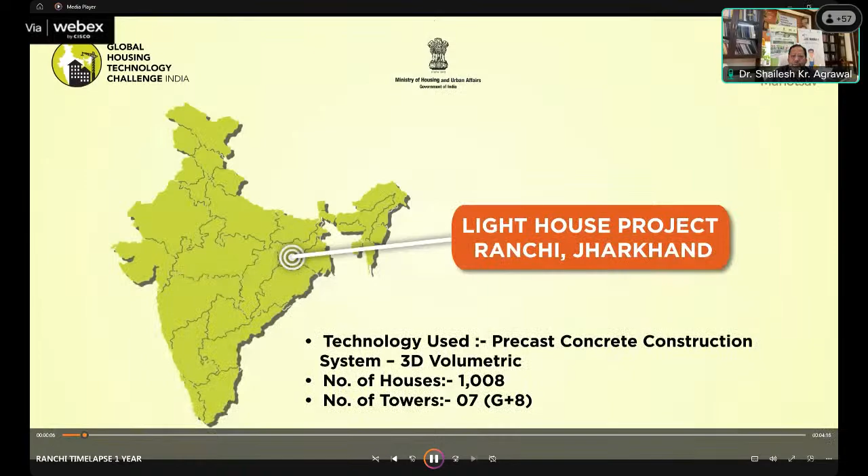Ministry of Housing and Urban Affairs, Government of India, has initiated the Global Housing Technology Challenge India to identify and mainstream best available global technologies, bringing a paradigm shift in the construction sector. 54 innovative technologies across 6 broad categories were shortlisted during the challenge process.

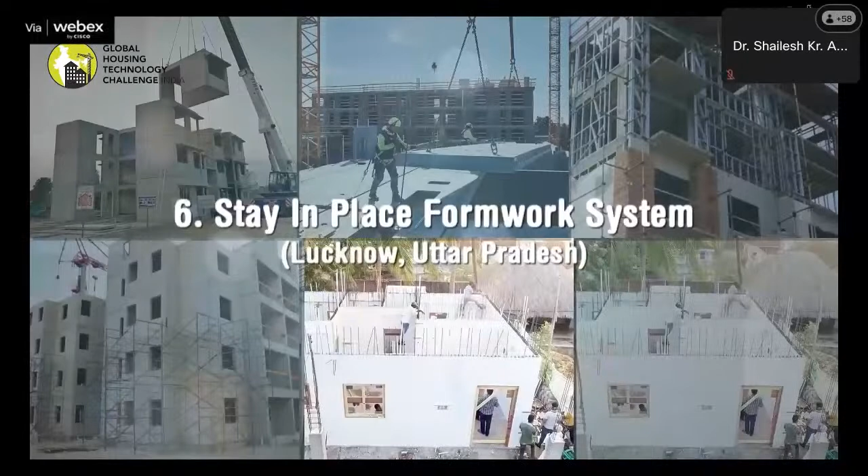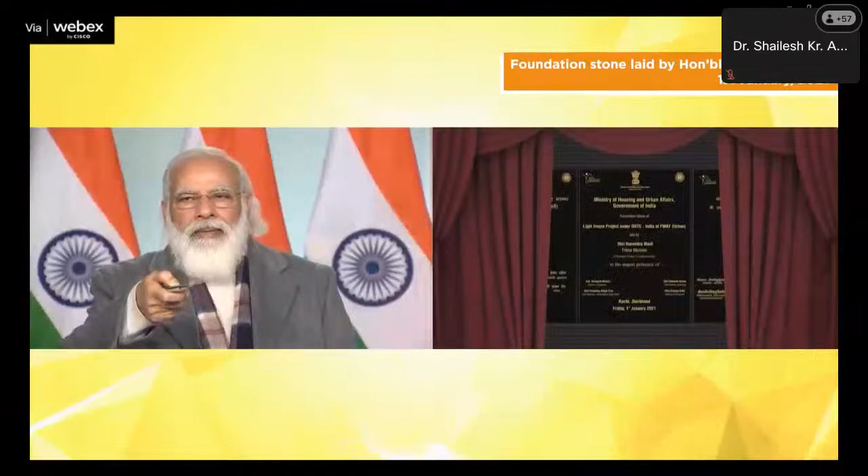6 lighthouse projects at 6 locations with 6 distinct technologies are being constructed. One Light House Project uses precast concrete construction with 3D volumetric modules, featuring 1008 dwelling units in G+8 configuration, along with all basic and social infrastructure facilities, being constructed at Ranchi in partnership with the State Government of Jharkhand. The Honorable Prime Minister laid the foundation stones of all 6 lighthouse projects, including at Ranchi, on 1st January 2021.

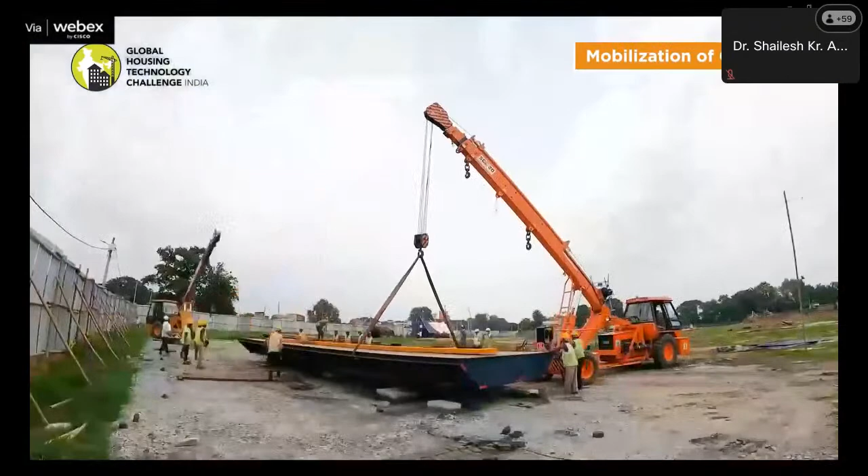Due to ground level issues, actual construction work of LHP Ranchi could only start in August 2021. The construction work is now in full swing. This 3D volumetric construction system is being used for the first time in construction of houses under PMAY-U. In this fast-track system, solid precast structural modules like room, toilet, kitchen, bathroom, and stairs are cast monolithically in a casting yard at the site under controlled conditions.

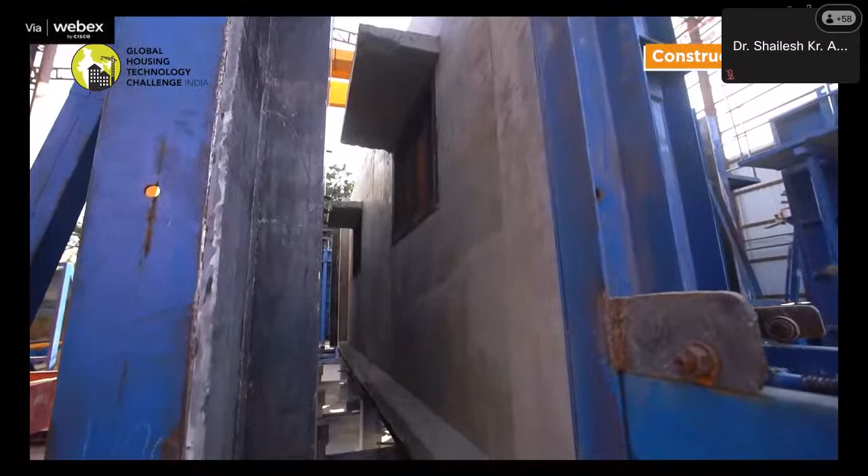In this modern system, construction begins with the design foundation of the building kept ready, while manufacturing of precast concrete structural modules takes place in the casting yard. Finished rooms, toilets, kitchens, and bathrooms are then installed at the site with the help of tower cranes.

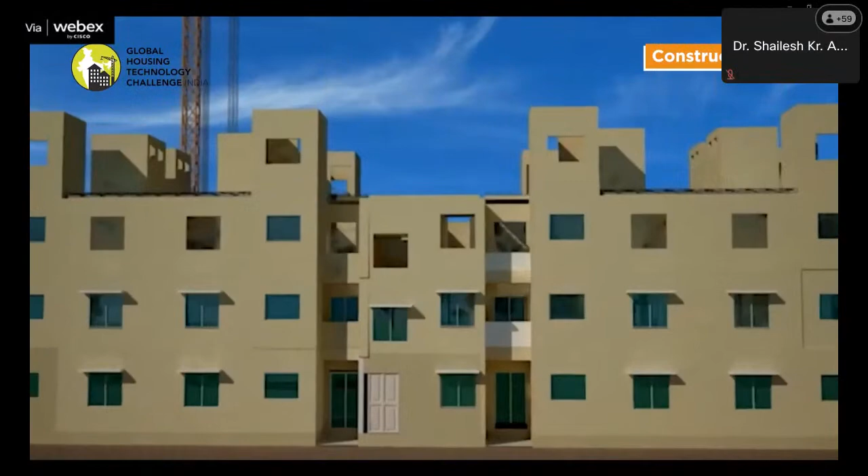Gable end walls are positioned to terminate the sides of the building. Pre-stressed slabs are then installed as flooring elements. Rebar mesh is placed for structural screed, connecting all the elements together. Consecutive floors are built in similar manner to complete the structure. About 90% of building work, including finishing, is completed in the casting yard, which saves overall construction time.

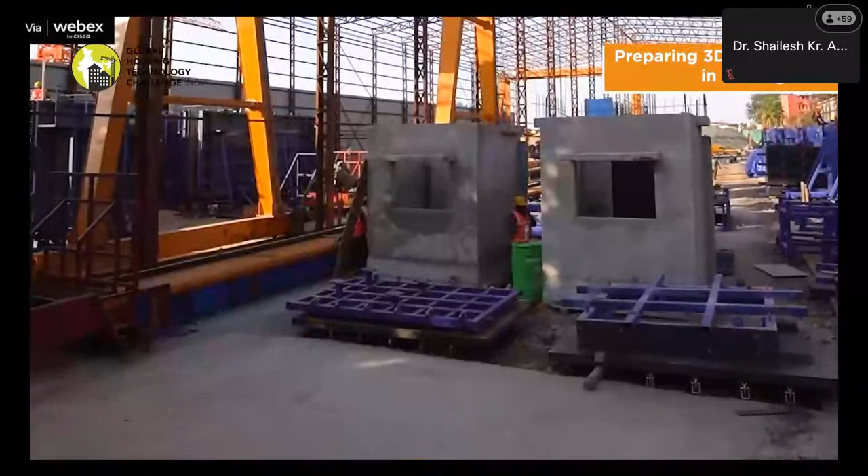The casting yard adjacent to the construction site in Ranchi, with all facilities, is now functional and is being used for production of precast 3D and other components. While casting yard facilities were being established, raft foundations for all 7 towers were initiated and are now at different stages of construction. Once foundation work up to grade slab is completed in a tower, precast 3D components ready in the casting yard will be installed at the site to complete the tower.

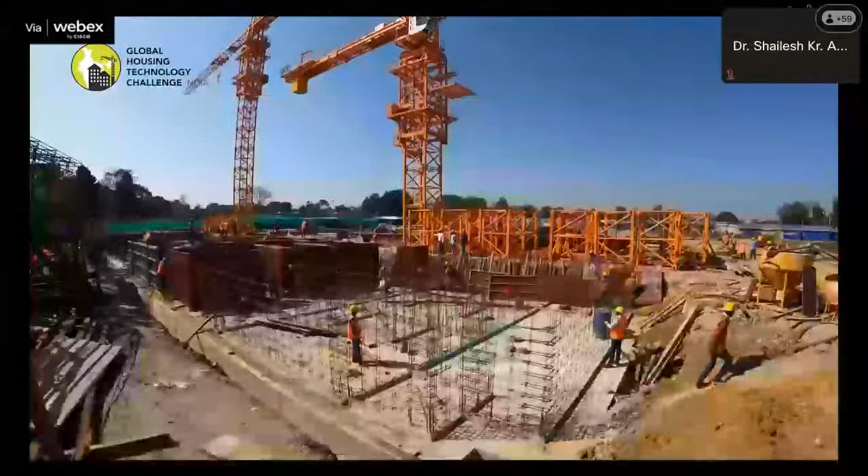With all these parallel activities, the project is progressing well and is expected to be completed well within the stipulated time. There is tremendous response for booking these houses by beneficiaries. The LHP Ranchi is serving as a live laboratory for learning, with about 200 Technograhis and other stakeholders visiting the site to learn the use of innovative technology in a real project.

Good afternoon. My name is Pankaj Gupta. I hope I am audible and my screen is also visible to you. Can anybody confirm it? Yes, go ahead, you are audible. Yes, go ahead. Okay, thank you, sir.

My name is Pankaj Gupta. I am from the Building Materials and Technology Promotion Council. The film which you just saw was somewhat older. My colleague will show you the latest development in this project, which is almost in completion stage. Meanwhile, I will start with the presentation on the technologies from the global housing technology challenge, and otherwise also these are alternate systems to the conventional systems which are prevailing right now in India.

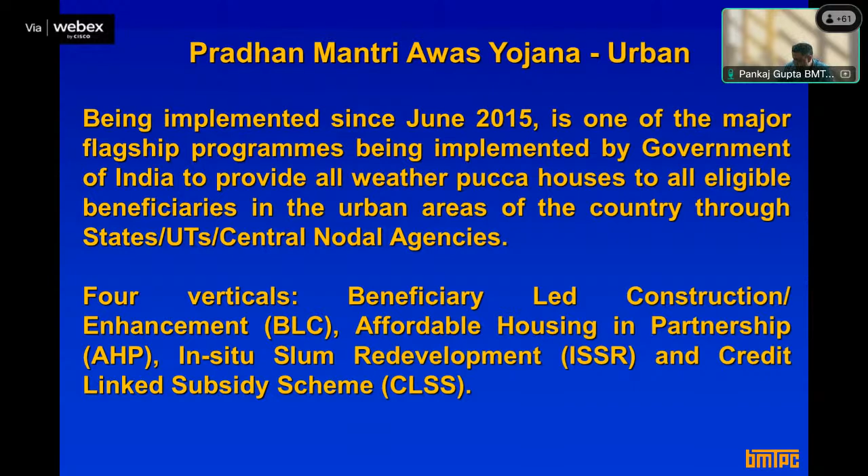Just to give you the current progress of the scheme: approximately 119 lakhs, or 11.9 million houses have been sanctioned. Out of those, around 113 lakhs have been grounded with construction going on, and 77 lakhs are already completed. This is the size of the scheme - we have more than 100 lakh houses under this scheme, which is the biggest scheme in the world.

That's the background. Now I will move to the technology part.

When the scheme started in 2015, during one meeting the discussion was going on and a demand came from various states that the requirement would be more than one crore houses. The duration of the scheme was 7 years. The question was how to construct more than one crore houses in 7 years with conventional systems, which are slow-paced, given constraints on resources, labor and manpower.

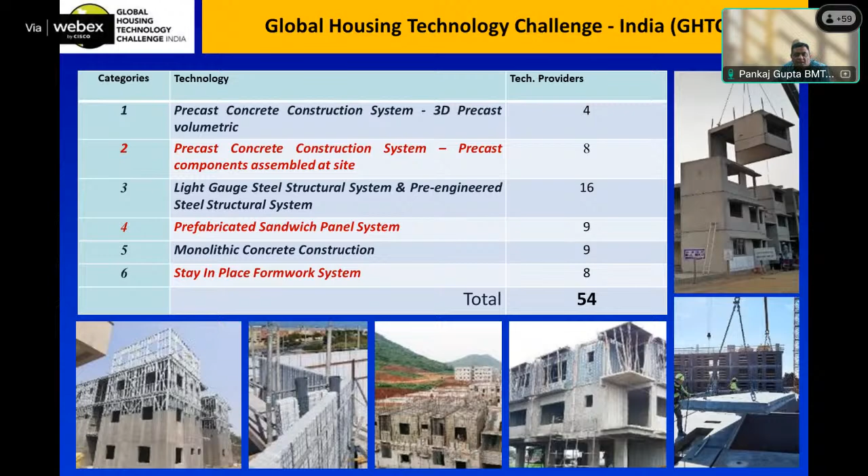As shown in the movie, for the 6 Lighthouse Projects, the idea was to implement and showcase this technology on the ground. It was decided that at least one lighthouse project should be constructed out of each category, so accordingly 6 states were identified.

Your mic? Mr. Patra.

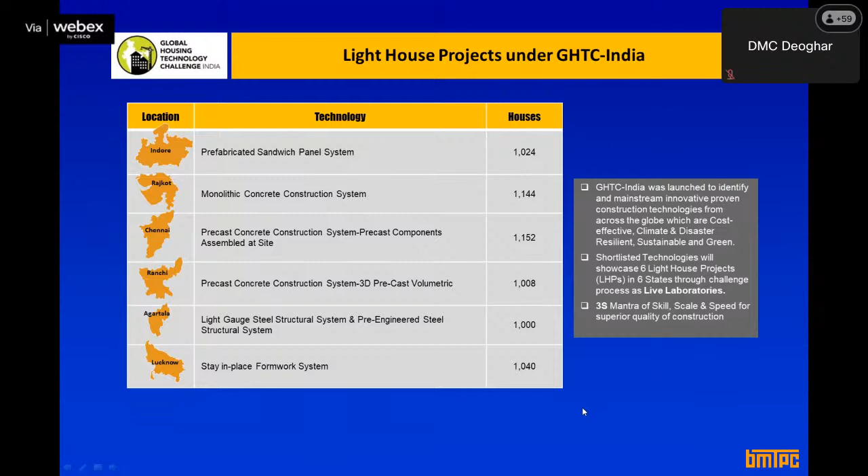Is it okay now? Yeah, okay. Please, this is the slide.

Starting with the first category, 3D precast - as you can see from the photo, or in the Ranchi movie shown earlier, the whole module, including walls, slab and floor, is precast in the factory itself, then brought to the site and assembled. That is why we call it 3D - instead of separate components, the whole module is precast and assembled at site.

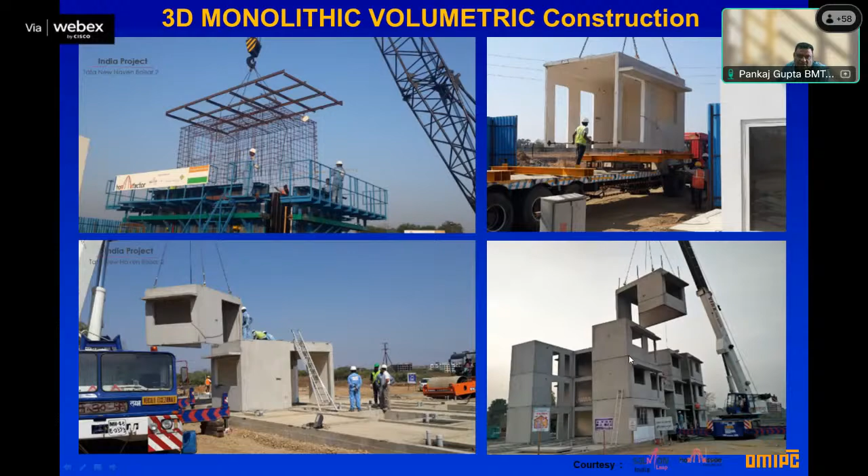This sequence gives an idea: the reinforcement cage is set up, then after casting, the module is ready and is assembled at the site. This is the technology.

This is a site photograph where a G+8 construction is shown, and on the right you can see how the modules are brought in. Not the entire house is done with modules - some 2D wall components are also used. A detailed presentation will be done afterwards by my colleague Mr. Jha. So this is the technology, and you can see how it looks after construction.

The second category we have is the 2D, whereas the earlier one was 3D volumetric. In 2D, all the components of the building or frame are customized in the factory, and we can do the casting of beams, columns, walls, slabs, staircase, everything separately, and then assemble them at the site. That is the basic difference.

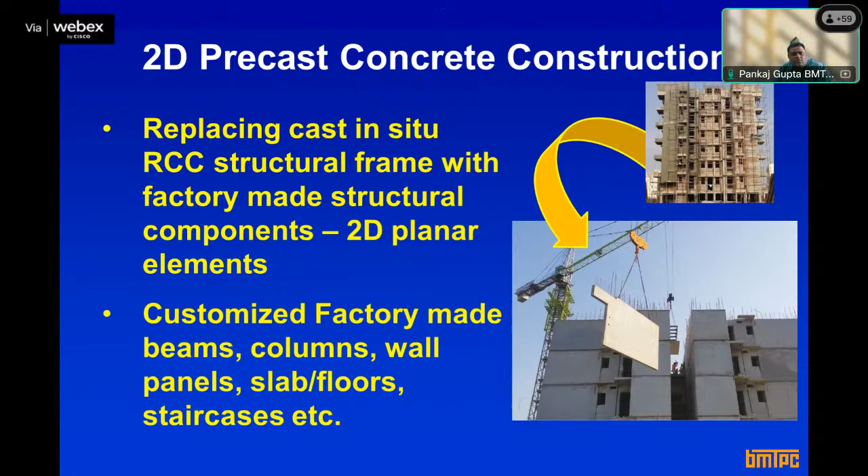Here you see the various components, including the staircase, wall panels, or the roof panels also. The factory of how the slab panels are cast is a very sophisticated factory. As you can see, this is the factory set up by BG Shirke. These are the components which are cast basically in the factory itself.

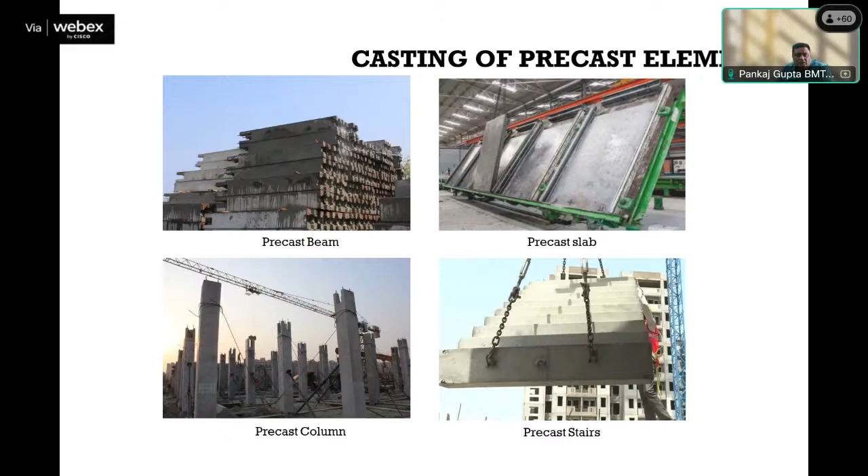This is how it looks like, the beam columns, if you can make out, these are partially precast with some reinforcement coming out at the top for the connection with the slab and other components. This is how the beam and columns are erected at site, and after this, how the slab is put on those beams and columns. You can see from this photograph that columns and the reinforcement from the slab itself is coming out. These are all partially precast type of components.

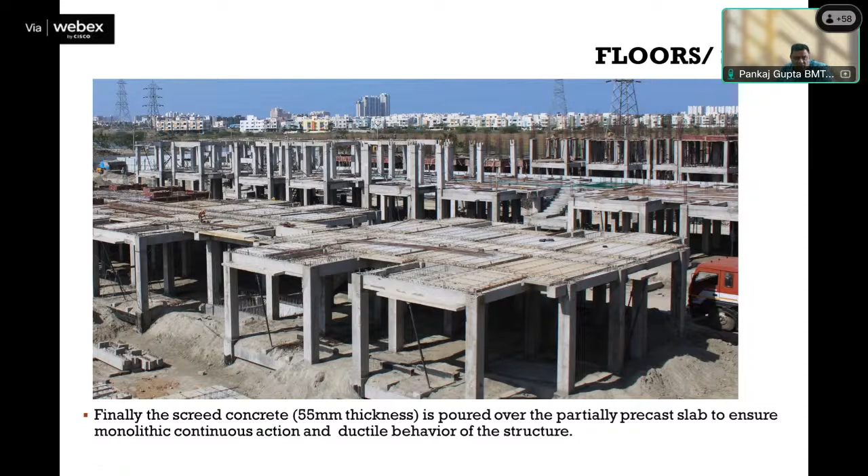After putting the slab, you can see this broader photograph from the site of the Light House project at Chennai, where the slab has been put, and then after this the concrete screed is put. After putting the concrete, all the joints are filled with grout and concrete, and then the whole structure becomes monolithic.

This is the view of our Lighthouse project at Chennai. You can see how it has come up with technology. We have 1152 houses, ground plus 5 structure, and 12 blocks were there, and each block was having 96 houses, 16 houses at each floor level. This is how it looks like.

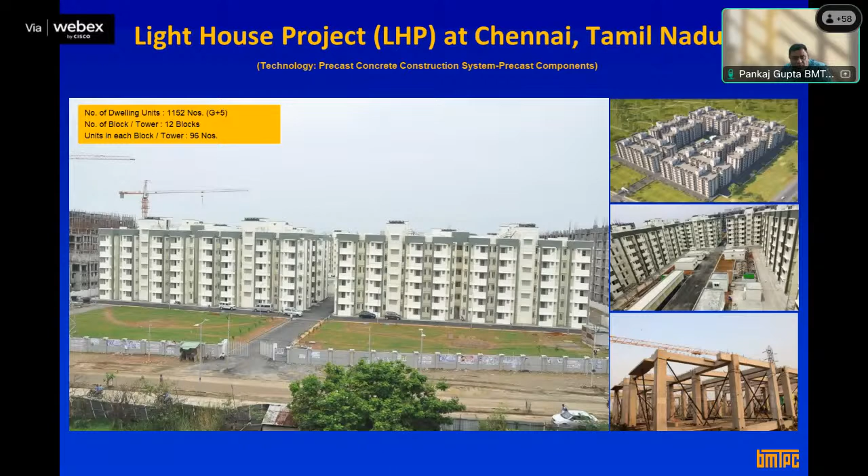Coming to the third category, our steel structure, pre-engineered steel structural system. In the photograph, the whole frame of the building is replaced by the hot roll system in place of RCC beams and columns - a hot roll beam column, and even the deck slab sheet, then reinforcement is put. So the staircase, and everything is done with the hot rolled steel. This is the basic difference between the standard RCC frame and the steel frame.

A closer look, you can see the beam columns, and in this system you can use various types of walling depending on the availability or what suits you best. Here the dry panels have been used. The idea is, since steel construction in itself is a dry construction, normally it is preferred to use a dry infill walling system also, so that it becomes very fast as compared to the conventional masonry.

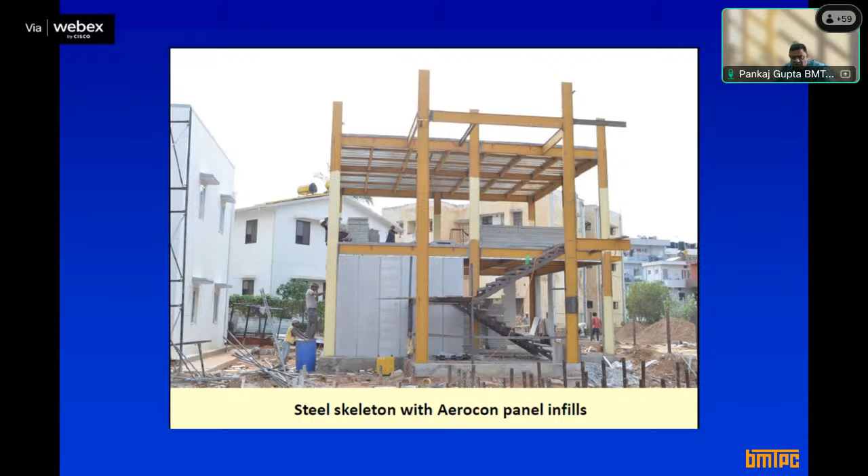The second variant in the steel system is the light gauge steel system, we call it light gauge steel frame, LGSF. You must have heard this generic term, where the whole system is being replaced with galvanized steel sections, which are very thin actually. It becomes a whole frame kind of system - instead of beam and column, it is a whole frame. Using these galvanized sections, load is taken by this whole frame instead of beam and column.

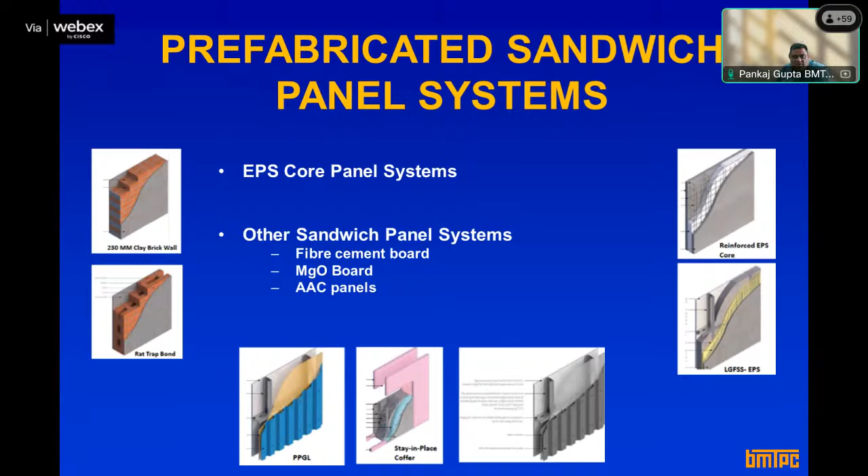We recommend this system, as I said, it is best to use them with the steel system construction dry wall, or if you want, you can use these panels with the RCC frame also. These are basically a replacement of conventional brick masonry, and once you get the frame done, you can get these panel walls done very fast.

This is one of the most popular categories - the polystyrene panel. If you see this expanded polystyrene panel, it comes as a white lightweight material, like thermocol, which is used for packing white goods and appliances. But here the basic composition is same, with some chemical properties added for construction purposes, making it fire resistant and durable. But the basic material, just to understand, is the thermocol type - very, very light.

You can see it used for various types of vents and walling, staircase, even slab can be done with it. On the right side, you can see the core panel - it has a welded mesh of 2 to 3 mm GI wire, which gives overall strength to the panel and takes the load as a composite panel.

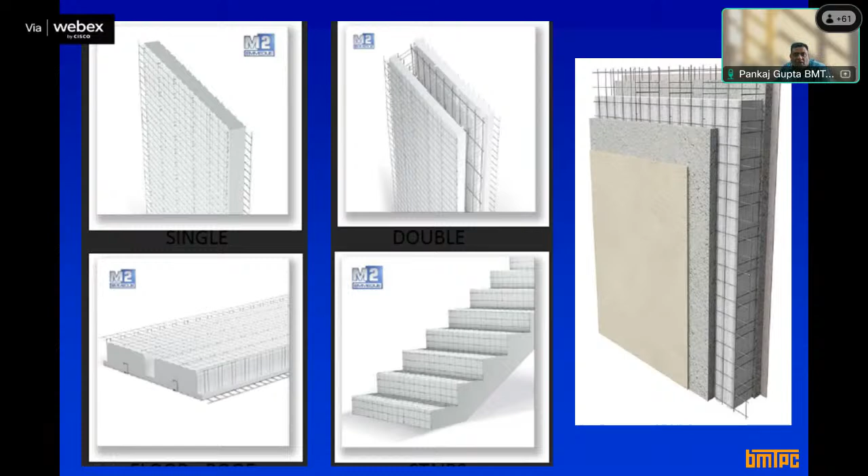Other types of panels - I'm showing you this panel because it's one of the categories of prefabricated panels, and our Lighthouse project at Indore is being done with this panel. We call it EPS cement panel. It is a composition of EPS, expanded polystyrene, in the form of small beads mixed with fly ash, cement, and other adhesives and bonding materials, and on both sides cement fiber board is added. This panel is manufactured in the factory.

Just to give you an idea, this is how it looks - this composite material with cement fiber board on both sides. Normally it goes up to the height of the floor, and the width we get is 610 mm, around 2 feet, with thickness varying depending on usage and requirement. These have a tongue and groove system so they can be easily connected at site.

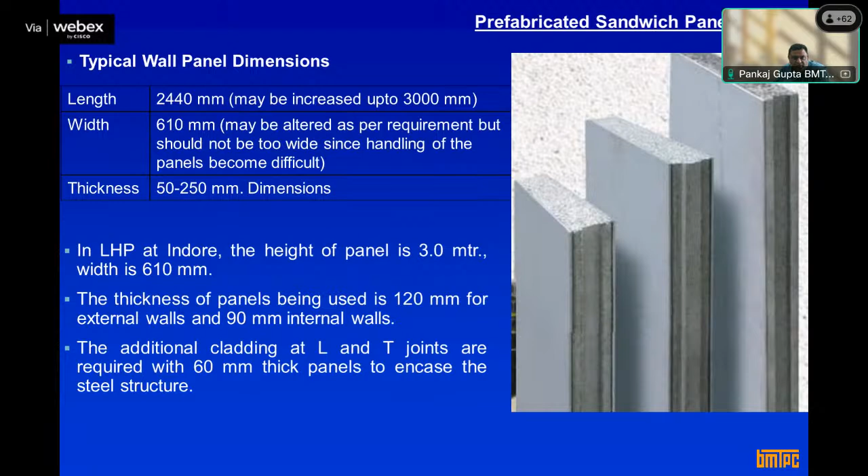This is how it looks in the factory - they are packed and manufactured. Since these panels are also not load bearing, we are using them as a hybrid system with a steel frame of hot rolled steel beam and column. These panels are used as infill walls, so we've been able to build very fast because of the dry wall system, and the slab in this project is also being used this way.

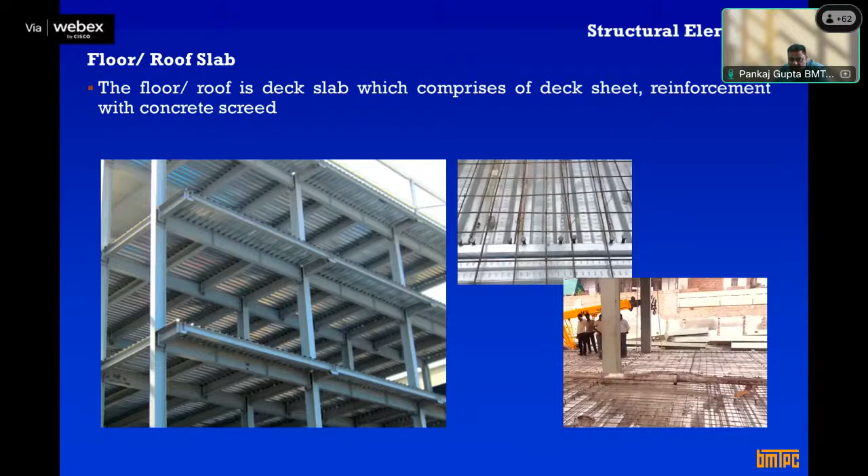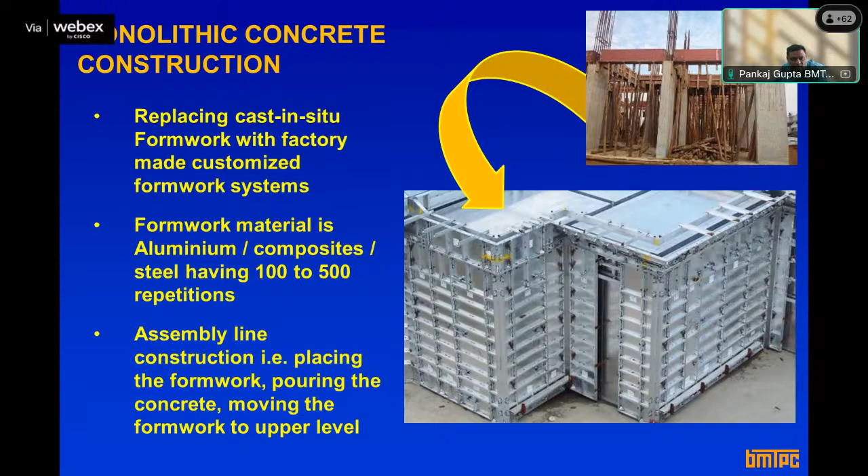Now coming to the next category, which is monolithic concrete construction. Here we are replacing the whole RCC frame with aluminium shuttering, replacing the beam and column structure, and even the walls, including slab and floor - everything is cast using this aluminium formwork. You get a 100% monolithic structure without any joint. Otherwise, with column cast afterwards, that is also monolithic, but here you get a completely monolithic structure in one go.

You will get a better idea from these photographs. Once the shuttering is taken to the next level and reinforcement is done, as you can see in this photograph, around 4 houses are there, and the shuttering has been done - it will be cast in a single pour. There is no need of doing separate pouring.

This is how you can get an idea of the foundation - normally the strip foundation is there in this case, and after doing the shuttering, you can get a cycle of 5 to 7 days easily for one floor.

The advantage you get here compared to the normal RCC frame is with walls. In a normal frame, you have to first do the columns, then beams and slab, remove the shuttering, go to the next level, and do the masonry separately. But in this case, you get the whole building or the outer part of the building, including the internal partition walls, in one go.

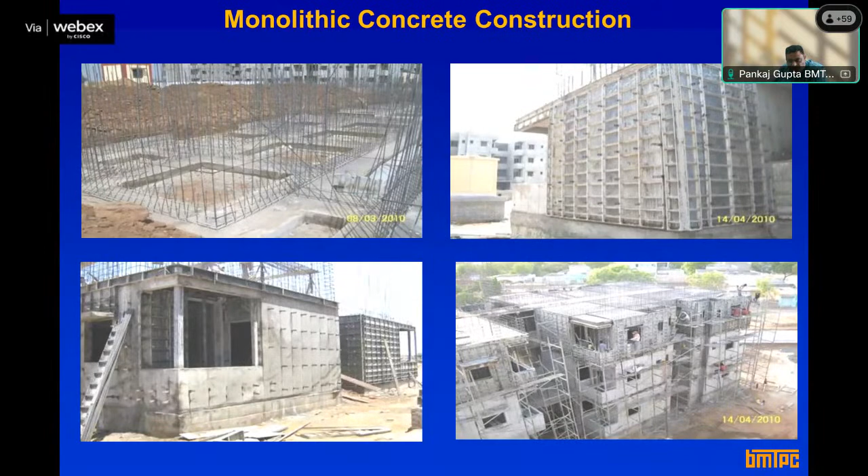The next day you can open the shuttering, and only the shuttering for the slab is kept for a few days. Otherwise you can remove the shuttering after 2-3 days, and you are ready for the next shuttering within a maximum of a week. This technology has been used in our Rajkot Light House project.

The technology was somewhat different in the sense that, if you see this photograph, this was a tunnel form. Instead of aluminum shuttering on all sides with the roofing, there are separate panels connected, around 3 to 4 feet - 3 feet, I think, maximum - and the height of the panel goes up to the height of the ceiling. So those small aluminum panels are connected, and then shuttering is done.

In this case we call it a tunnel form. To get an idea, the whole frame or outer part of the building or floor consists of two inverted L's, and then the whole system becomes a tunnel by joining these two inverted L's.

Shuttering is done separately for the slab and for the sides. After joining these two inverted components, it becomes a tunnel, and here also a single pour of concrete is done. Then you can go to the next level - immediately the next day the shuttering is done and the whole tunnel comes out, and you take the tunnel to the next level.

The advantage here, compared to aluminum shuttering, is that with aluminum shuttering you have to remove all the small panels, take them down, then take them to the next level and join them again - that takes a lot of time. But here the whole tunnel formwork comes out after casting, and you can take it directly to the next level.

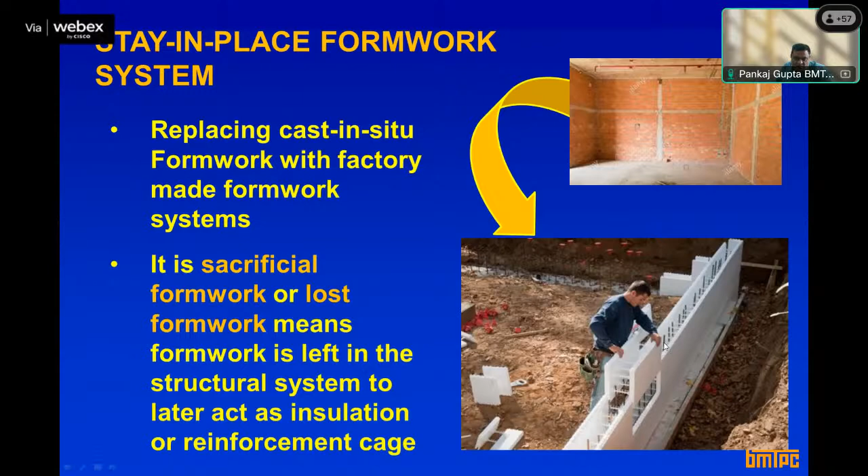This being an EPS material, the reinforcement is also put in as per the requirement of the building. After putting all the blocks of EPS and reinforcement if required, you can do the concreting.

The advantage here is these are pre-finished panels, PVC, and you don't require any kind of finishing outside, neither in terms of plastering or even painting. These are totally pre-finished.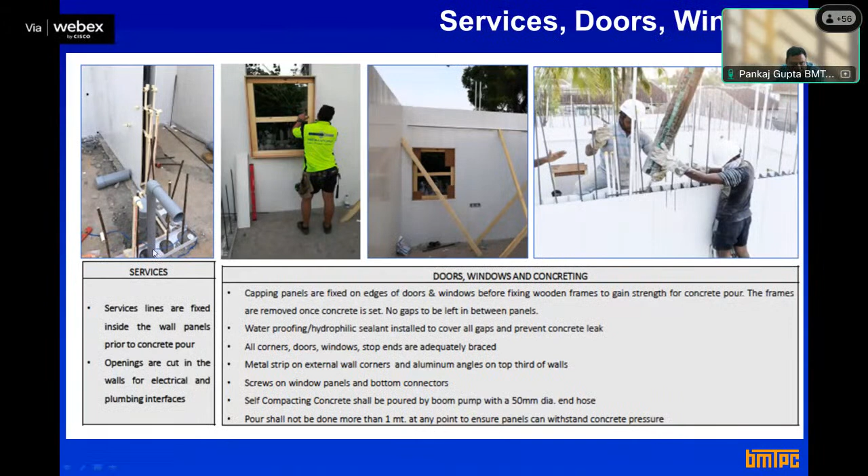Just to give you more idea of how the services are being put, all the provisions are there inside. You don't have to put any services afterwards. All the electrical, plumbing, water supply, everything you can put before doing the concreting, and nothing needs to be done after.

With this, I come to the end of the technology part - the 6 categories. As I told you, all the technologies broadly available in the country now can be put into these categories.

The major advantages of using alternate construction systems: these are very fast, as you can see. There's optimum use of resources since these are all prefabricated and pre-designed, so you don't have any wastage - minimum wastage is there. Pollution is not there at the site since everything comes from the factory itself and you just assemble at site. This is an industrialized system, meaning you can plan before, and whatever the size of the project, you can handle it easily with proper planning.

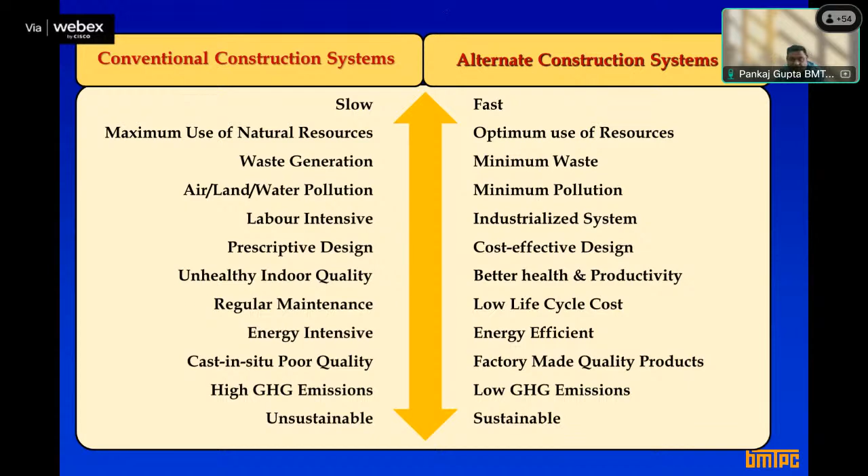With conventional construction, quality issues are there, and a lot of energy and money goes into seepage issues, and even the plaster goes off, and reinforcement problems occur - sometimes you see issues related to that. As I told you, with these systems quality products are there, with low GHG emissions, and overall these are much more sustainable compared to the conventional system.

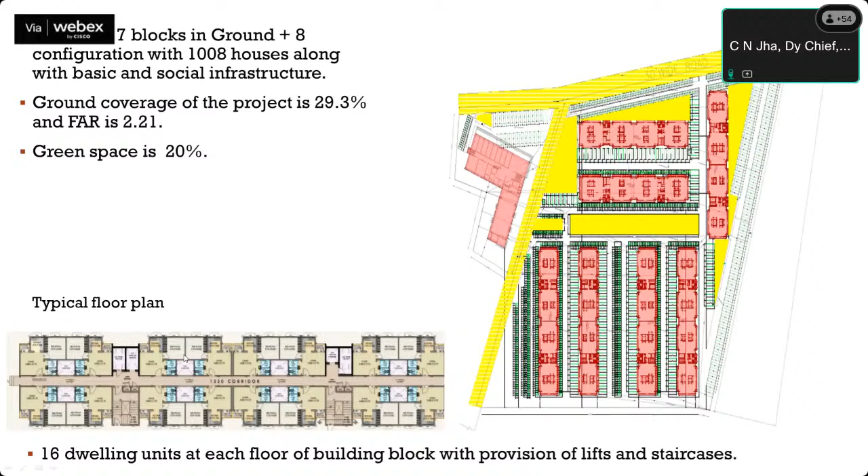A typical dwelling unit plan you see here - this is how the unit will look after getting fully finished with all fixtures and furniture. You can see this is the living room, here is the entrance, this is the bedroom, this one is kitchen and bath and toilet, and you can see the balcony also approachable through the living room.

The carpet area is about 29.85 square meters, which is about 5 square meters higher than the minimum requirement of 25 square meters as per NBC. So this is about 20% higher, fulfilling the size requirement of NBC.

This is a set of 4 units, and the project includes many sustainable features. It has to be green rated as per GRIHA, with a minimum requirement of 3-star rating. There is use of renewable resources and rainwater harvesting - all runoff from the rooftop, road, and site area is kept within the site through rainwater harvesting pits, so no flow goes outside.

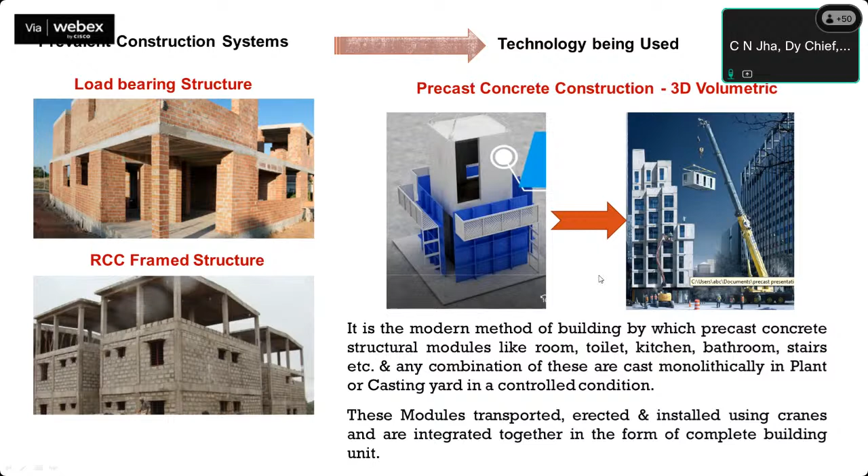Regarding the structural elements, one is foundation and other is superstructure. In the superstructure, it is not entirely 3D modules, but there are certain walling panels and other pods also, which I will cover subsequently. There is a solid core pre-stressed slab - this is not a necessity, but the site is very close to the aerodrome in Ranchi, and because of some height restriction, to slightly reduce the overall height of the building, this solid core precast slab was adopted just to reduce the thickness of the slab.

The foundation is conventional only, as per this geotechnical investigation report, including parameters such as bearing capacity, soil strata, water table, etc. The raft foundation has been adopted here with shear wall up to the plinth height, and then a grade slab is there at plinth level. So this foundation is conventional only.

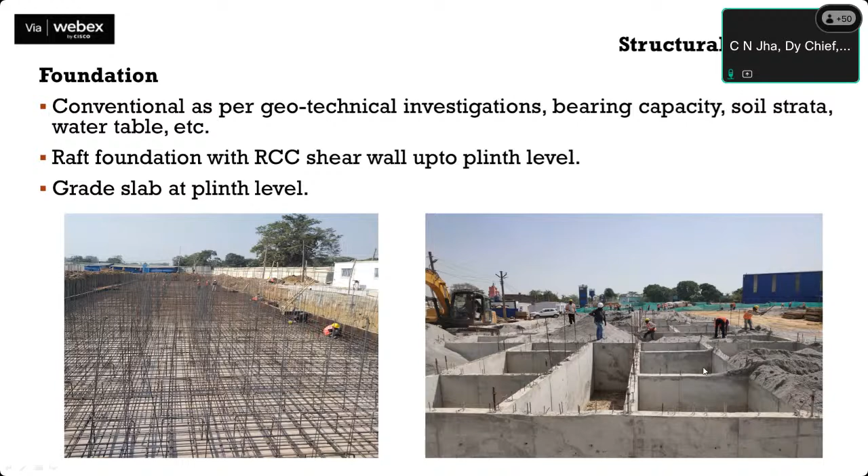Regarding the structural system, the primary one which we want to show and which has been adopted here is this 3D volumetric rooms or modules.

For producing these 3D components, what we require is 3D steel molds, created to suit the sizes of the rooms which are to be produced. In this particular project of LHP Ranchi, the kitchen pod and bath pod, which comprises toilets also, have been produced as 3D modules, suiting to the size of the kitchen and bath unit.

Once the molds have been created, steel mesh is put in that mold as per the requirement. We have seen this in the movie also. Along with this steel mesh, electrical and plumbing lines are set up as per requirement, and all the blockouts for doors and windows are also set up at the same time. You can see here the window cutout.

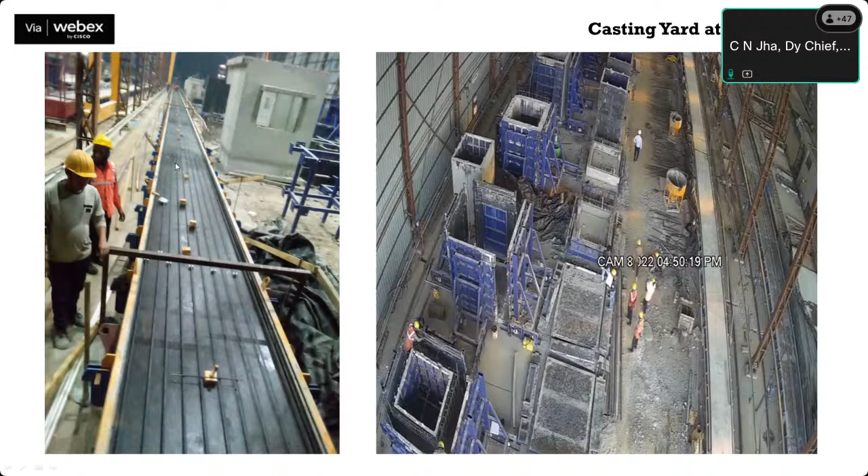On the left side you see a very long mold, about 65 to 70 meters long, for pre-stressed slab. You can see the reinforcement in this pre-stressed slab - those are first stressed and then concrete is put. This is for the floor slab, which is pre-stressed. And you can see the series of molds for 3D modules.

Similarly, the operations within the casting yard - here you see the slab or wall components being cast.

So what are the advantages of these systems? You must have come to know the advantages also, because you can visualize them. Up to 90% of the building work, including finishing, can be completed in the plant or casting yard, leading to significant reduction in construction and occupancy time.

Here I would mention that in the case of Ranchi, the casting yard area and storage area was very limited, so the construction agency faced difficulty because of this. The finishing part - they planned to finish at least the bath and toilet pods fully, along with floor tiling, wall tiling, and all fixtures. But because of the limited storage area, they could not work on those finishing aspects and could not complete the finishing. So in this case it is not 90%, but slightly lower than that. But they are capable of achieving this finishing part also, so that this ratio can be increased up to 90% as well.

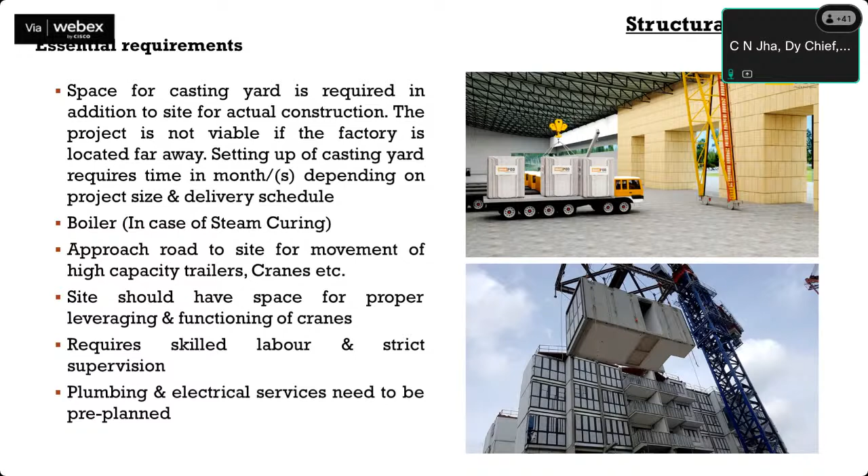Here in this case, the technology provider and construction agency is Messrs SGC Magicrete LLP, and technology provider is Magicrete Building Solutions. Third-party quality assurance has also been appointed, and their technical persons have been deployed at the site also, the agency being Cube of IIT Madras.

Some design basis briefly: the superstructure is designed as a shear wall system, as in monolithic concrete construction. Wind speed here is very basic - basic wind speed is 39 meters per second. You can see this from our vulnerability atlas of India. This is a very basic zone, from the lowest low damage risk zone, just above this is moderate damage risk zone B with a speed of 39 meters per second, so a very moderate and very safe wind speed.

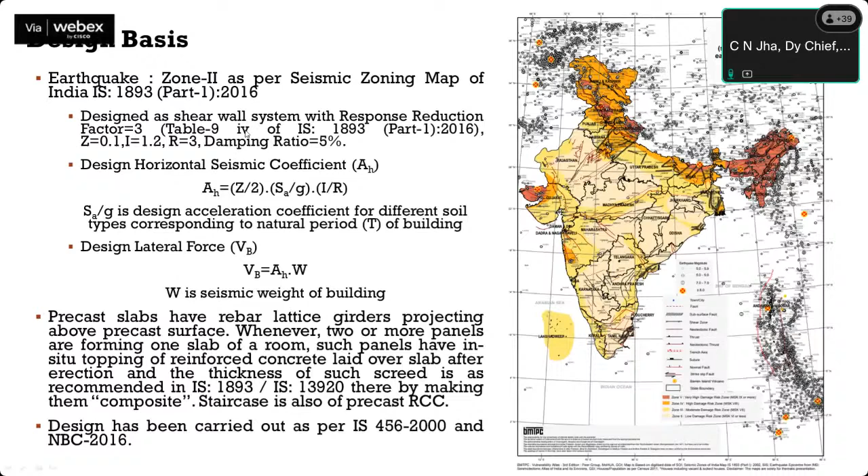Similarly for earthquake, it is in the lowest category, though this earthquake code is getting revised, but as per the earlier code, this is in zone 2, which is the lowest zone - very low damage risk zone. So from that angle, wind and earthquake, this is a very safe zone, Ranchi. And as per the codal provisions, the design has been made.

Then comes the construction sequence. As we have already seen, the foundation is a raft foundation as per the conventional method. The superstructure is a combination of 3D modules, walling components, and some pods also, which I will cover, and solid core pre-stressed slab. Then MEP - MEP is along with the superstructure only.

Construction sequence in the project: the foundation of the building is getting ready, and while this is happening, manufacturing of the precast concrete structural modules takes place at the factory. But before this manufacturing starts, you need to do the setting up of the precast unit also, along with the molds and components required as per your delivery schedule.

So if you want 6 units to be erected per day, you need molds - if you are going for a 3D mold for 2 units, 2 rooms, then you need to have molds for 12 number of 3D rooms for achieving that speed of 6 units per day, and accordingly the demolding and all the process parameters are set.

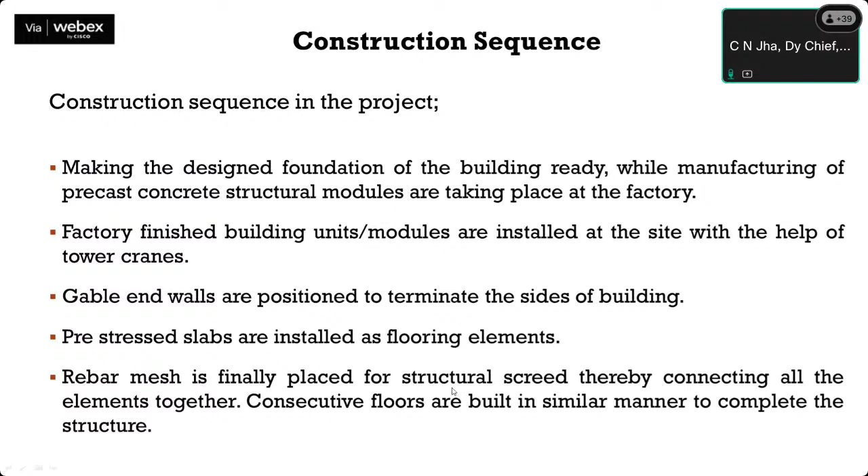Specification of concrete and steel used in the project: raft foundation, precast shear wall, and precast partition wall - meaning all structural as well as non-structural walls along with the foundation - are of M30 concrete. Precast pre-stressed solid slab is M50. Structural screed is M35, which we put after for joining horizontally the entire module and all the structures. Then the steel specification is also shown.

This is the concrete mix design. You can see for M30, which is the main component for all the walling, foundation and all, the cement used is slag cement with 390 kg, and water cement ratio is also very good at 0.35, ensuring high strength and durability. If water cement ratio is lower, then the coarse aggregate and all improve. Since this is slag cement, about 64% slag component has been used here, so that proportion of OPC has been conserved.

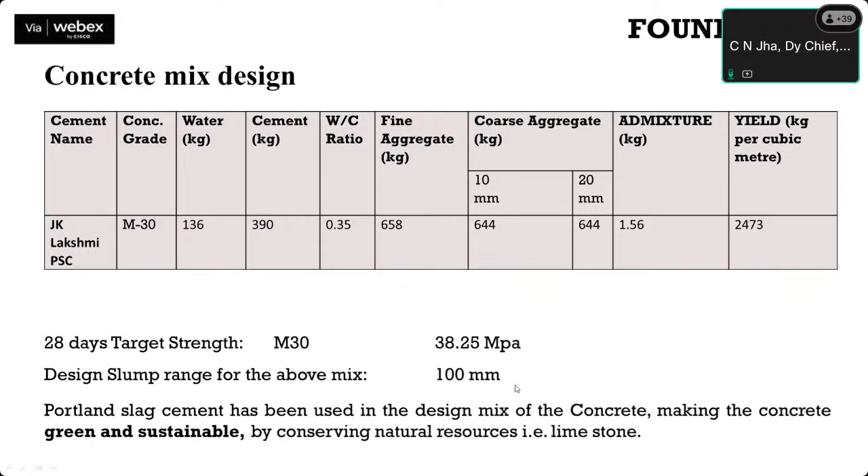Picture of the batching plant, then the start of the foundation work.

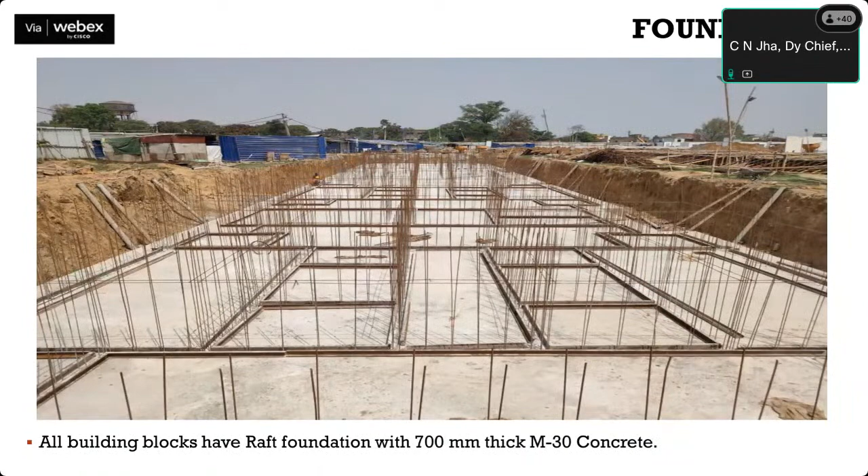These are the various structural connections, typical connections. You can see that the prefabricated components are getting connected with the help of screed concrete, with reinforcement going as per the designed length from one component to the other. Then the screed concrete is done.

In these modules, the Groutec coupler has been used. So at 4 corners of these 3D modules, 4 Groutec couplers at each end have been put.

So how is this one connected? You can see here the top projection, and this is threaded, and steel coming from the upper side is threaded into this, and the bottom vertical steel, which is projected outside, goes inside this. Once it has been put, you pour the grout from the bottom, and when it starts flowing from the top, it means the entire space has been filled through grout. This way the modules have been connected with this Groutec coupler.

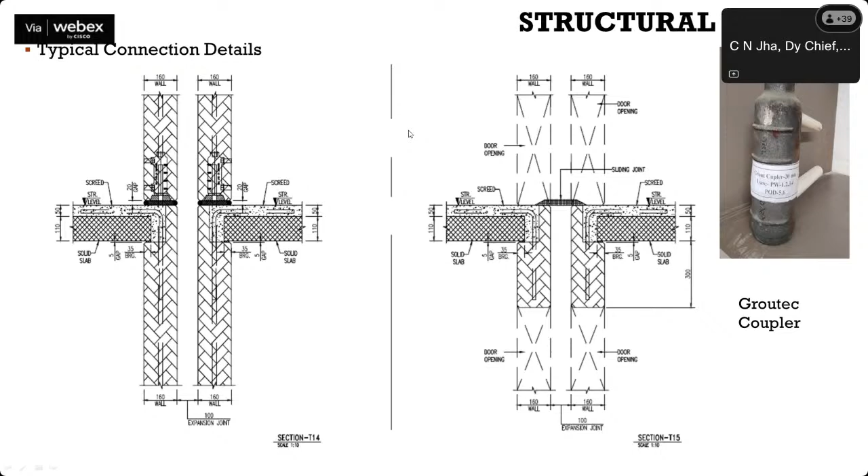Then this is the H pod, another component I was talking about. So you see the H component, which is being used in the corridors here, and it looks like this, put like this. There is a projection, and the upper projection is not exactly like H, but in the shape of H, with the dimensions slightly different, upper and lower.

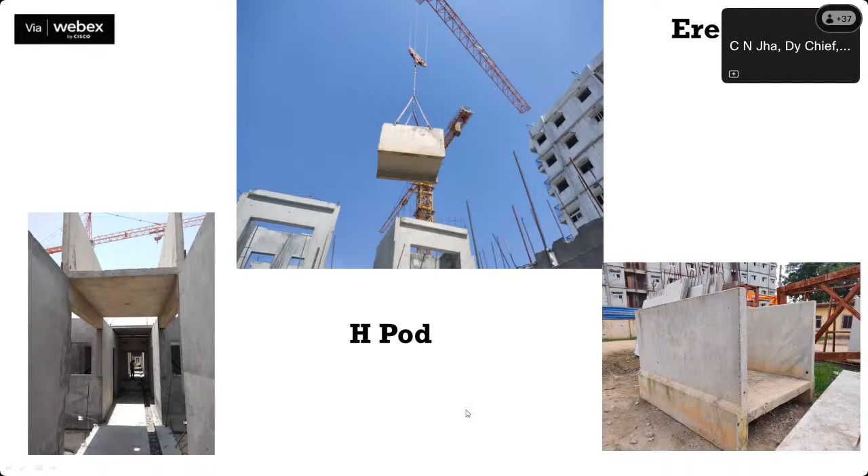There are H pods, you can see. This is like this, coming in between two rooms, and this is the outer side of the room. You can see the window here also, and this is the inside, like the partition wall acting as a partition, and this is the inner face.

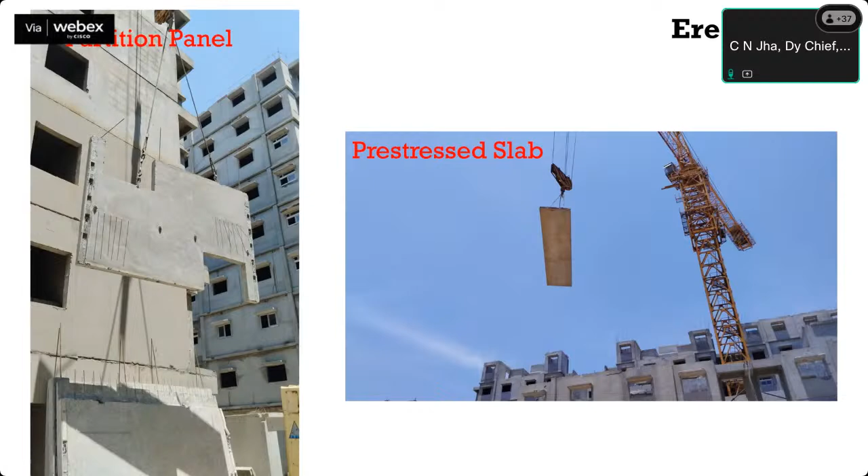Then there is this one, the staircase module, partition panel, and pre-stressed slab. Gable wall, which is terminating the end, like at the end, which is coming.

Then there is a sequence of erection also for these prefabricated components. It's not that they are just put in place. This comprises lifting the precast panel and placing it on its designated location.

First you put this one, any precast panel. Then it needs to be aligned. So you adjust the panel to position and secure it with diagonal props. You can secure the position with the diagonal props.

Again, check the alignment and verticality of the panel. If necessary, adjust the temporary propping to achieve the level and position of the precast element. Then check the stability of erected props before releasing the hoisting cable. You don't immediately release the cable; you first assess whether it is stable, then only you release the cable.

Carry out the stage passing QC inspection after the erection of the element and before grouting. Before grouting, you check whether the joint width between the panels is within the designed allowances. Then you do the grouting, preparing and applying non-shrink grout to seal all the gaps and checking whether all the joints have been properly sealed. Only after that is the installation of the subsequent precast panel above the erected precast panel done.

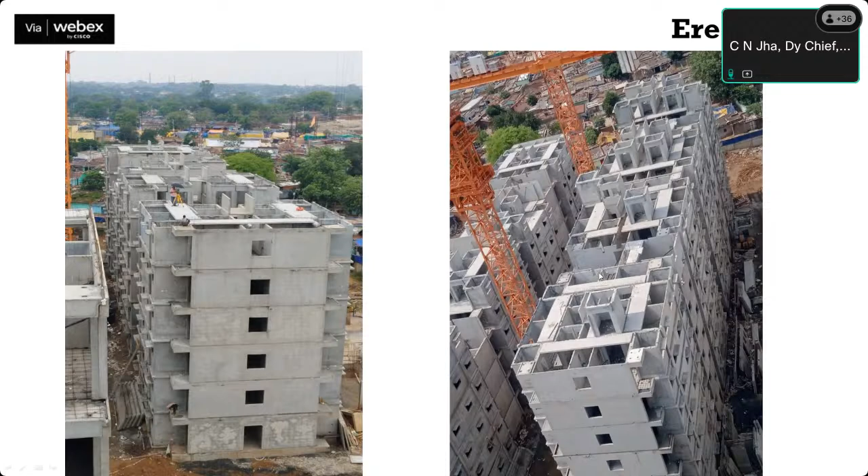And now this is the stage of the building. You see that almost this is finished. And inside also you see the drawing room, and this one is the kitchen.

The present stage is that there were total about 10,784 components, the production of which has been completed at the casting yard, and they are getting it dismantled also, since all components have been produced. Out of 7 blocks, 6 blocks have been completed. Erection and finishing is also in advanced stage.

Only in block number 4, the parapet wall is in progress - nearly complete, but still in progress. Infrastructure work, boundary wall completed 56%, and the other part which is not completed is because it has been encroached, and once the building project is completed, that will also be done.

And after they completely dismantle the casting yard - STP and UG water tank civil work has been completed and now machinery installation is going on. Road and external electrification is also in progress.

So this project, as you have seen in the movie, was not started on 1st January 2021. It started quite late - in fact from October or starting November, this project started in 2021.

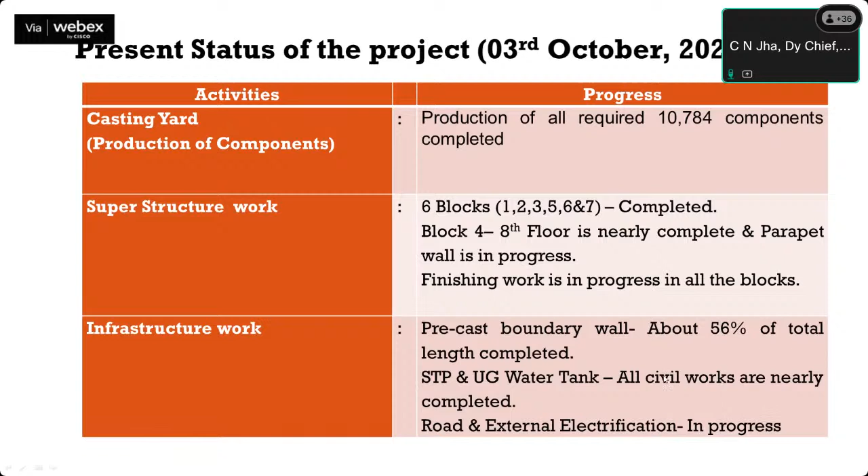And they faced space constraint also. So because of this, the project got slightly delayed, and now it is at an advanced stage of completion. So with this, I conclude my presentation - thank you all.

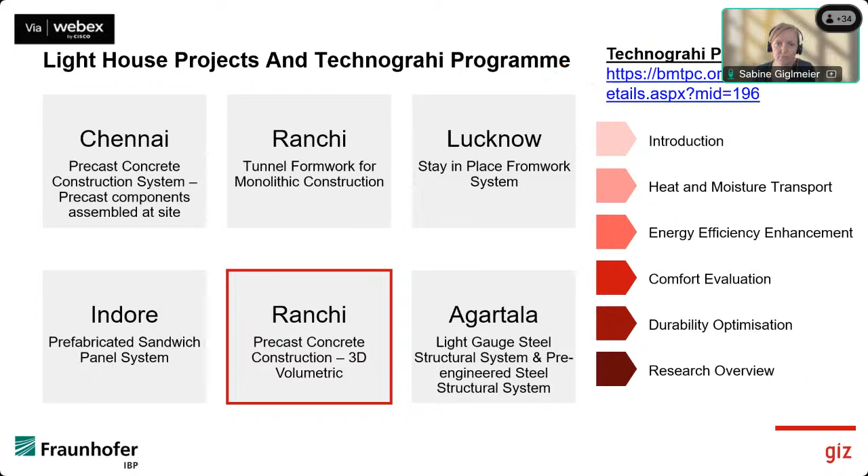Before we take a closer look at the technology used in Ranchi, let's first understand the climate conditions there. It's important to know that not all construction methods work equally well in all types of weather. A building technique that works in warm and humid areas might not be suitable in places that experience frosty winters, and the other way around. So when evaluating a technology, it's crucial to consider the specific weather conditions in the area.

Ranchi lays in the eastern part of India in a subtropical climate zone. The rainy season is from June to mid-October, and in summertime it's rather hot with maximum temperatures up to 40 degrees. In wintertime it gets slightly cool, but there is usually no frost. So the challenge with buildings there will be avoiding overheating for the people inside. That is what we will be focusing on. Heating, on the other hand, will not play a major role as it's not getting too cold in the winter months.

Let's quickly recap what the construction system was about. I guess we can go over it very quickly as you heard a lot about it already. The construction type used in Ranchi is made with magic pods, like formwork modules. These magic pods are poured with concrete to create room modules, 3D volumetric elements. This prefabrication reduces the construction time on-site, and therefore the environmental conditions can be controlled and managed during production. This allows high standard quality of prefabricated components, and the formwork or molds can be used again and again.

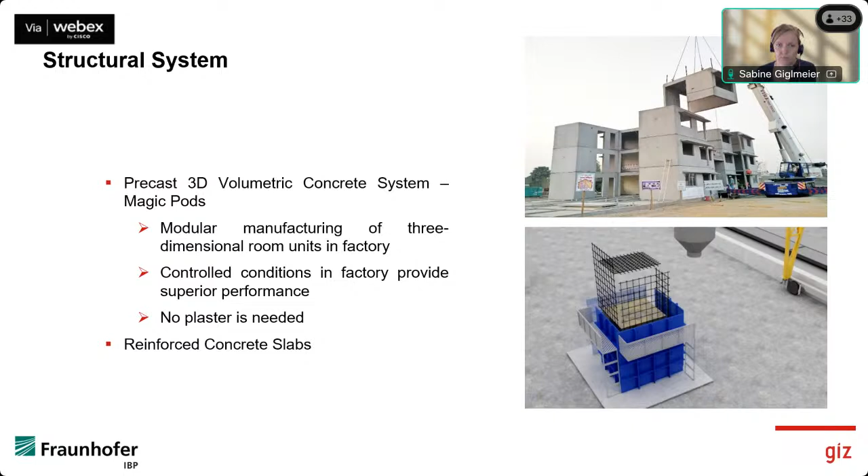As said before, heat protection is a major task in Ranchi, as temperatures get very hot during summertime. We have different options to design buildings to improve thermal comfort for residents. In previous webinars, we already learned what comfort enhancement we can reach through measures like shading, insulation, or cool colors. Rooms overheat primarily when too much sunlight enters the room.

Thus, in this webinar, we want to look at options regarding window design to avoid overheating. With a comprehensive design of windows, we can reduce the solar gain significantly, and in the next few slides we will look at this in more detail.

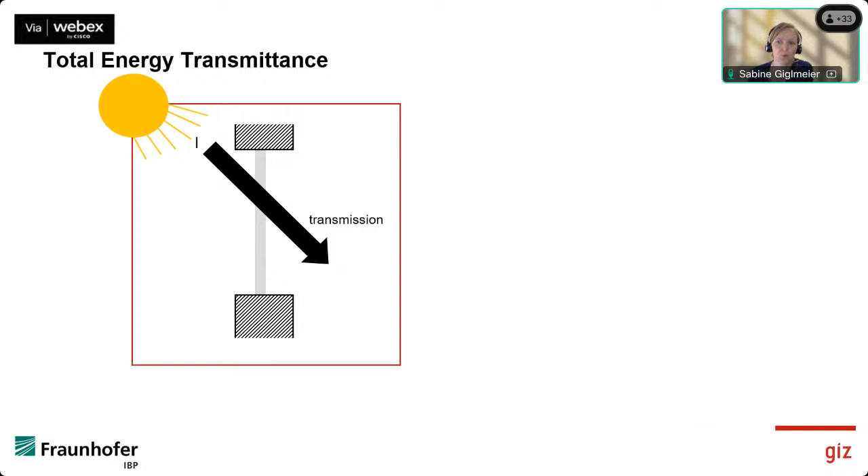Normally, we do not just have openings in our buildings, but install windows. And if we do so, we add a barrier for the solar radiation. At this barrier, one part of the solar radiation is blocked from entering the room by absorption, which heats up the glass. Moreover, another part of the solar radiation is reflected at the surface of the window glass.

We therefore can conclude that the solar radiation I coming from the sun is reduced by reflection and absorption, so the total radiation entering the room is reduced. We can calculate this reduction by using a factor G.

The factor G we have introduced is used to calculate the amount of energy transmitted to the room. In building physics, we call it the G value, the total energy transmittance, which includes the primary radiation through transmission and the so-called secondary energy supply through the heated panes by absorption. The G value is a characteristic for different window types, and it can be calculated and measured. Most producers of windows will give you the G value for their product.

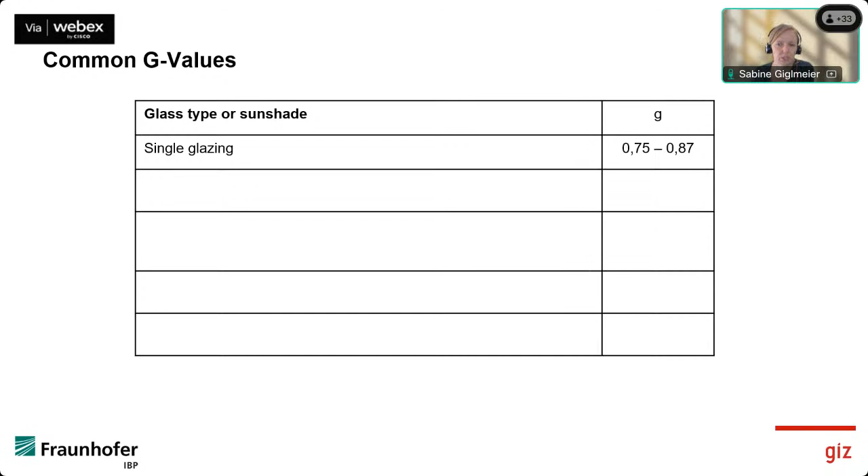So let us now have a look at some typical G values. As we have seen before, single glazing reduces the radiation by reflectance and absorptance, leading to a G value of 0.75 to 0.87. This value indicates that 75 to 87% of the solar radiation from the sun will enter the room. So the lower the G value, the less energy reaches the room, and the less energy enters the room that can overheat the room.

If we now look at different windows with different glazing, we see that the G values can be reduced from 0.87 to 0.12 if we additionally use an external solar protection. The best insulation against radiant energy is providing glazing with external shading. But also a clear glass with internal sun protection devices can improve the G value a lot. And also some absorbent layers on the glass can improve the G value.

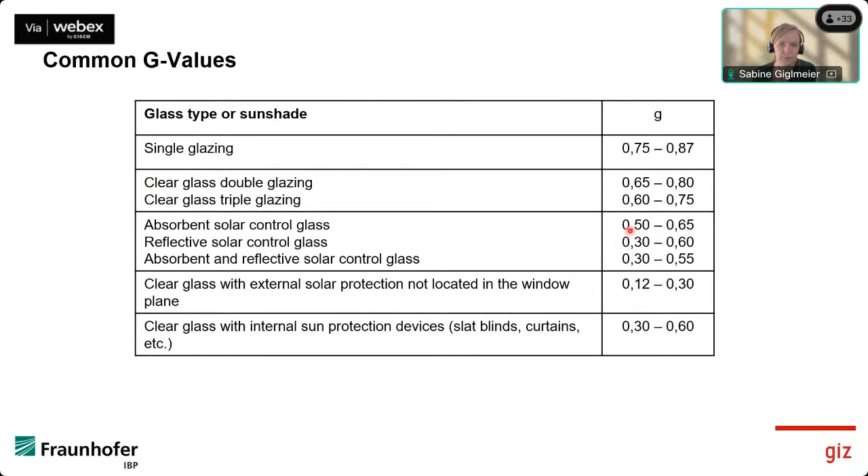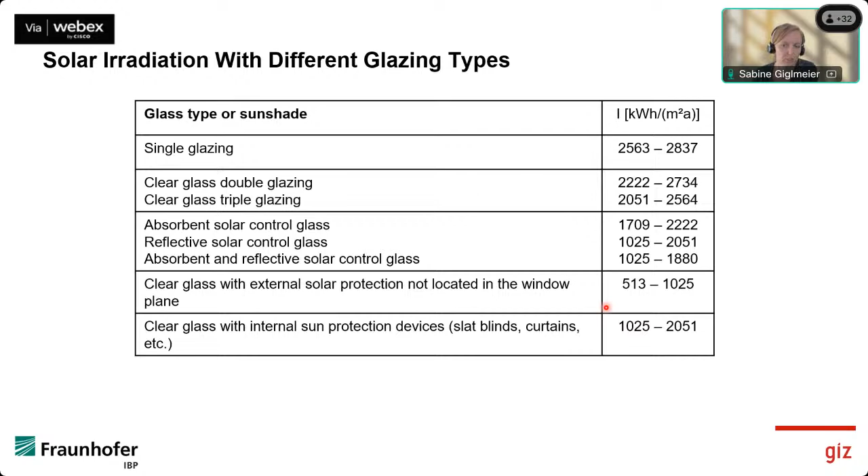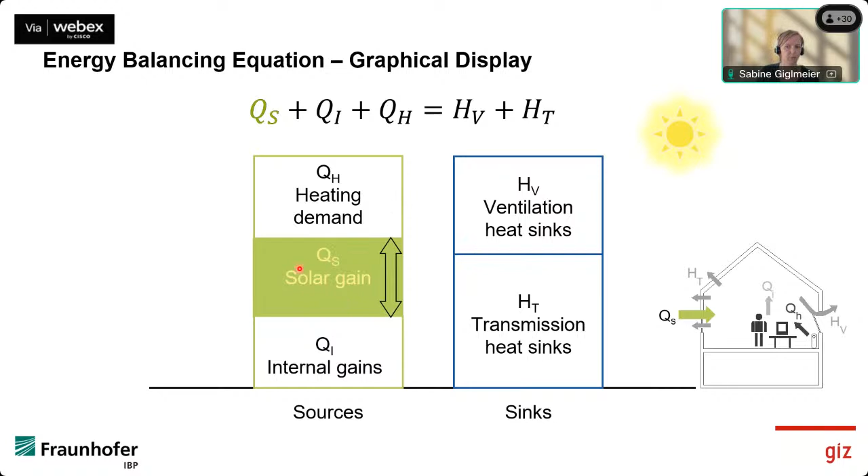As we are focusing on solar gains in this webinar, we will now take a look at how large this value, QS, the solar gain, becomes, and on which factors it depends and how it is calculated.

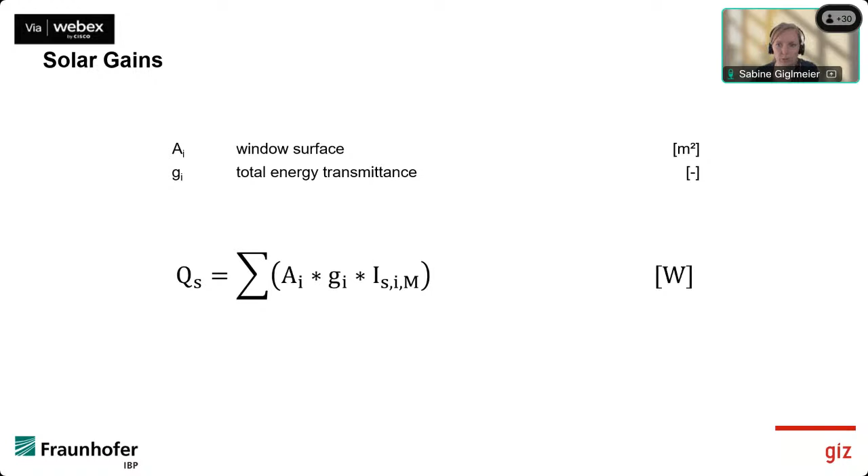It is unitless and, in short, describes the total transmission of energy through the window, which you heard already before. Finally, the value of the solar irradiance, I, is multiplied with it, in units of watt per square meter. If this calculation is carried out for each window and added to a total sum, this describes the QS value, the total solar gain.

So let's go back to the solar irradiance I again. This value depends on meteorological boundary conditions. Depending on the location, the course of the sun, and thus the angle of incidence, differ and can be described as the resulting irradiation that hits the Earth's surface. Depending on the time, the position of the sun changes, and therefore the irradiation on the surface differs also.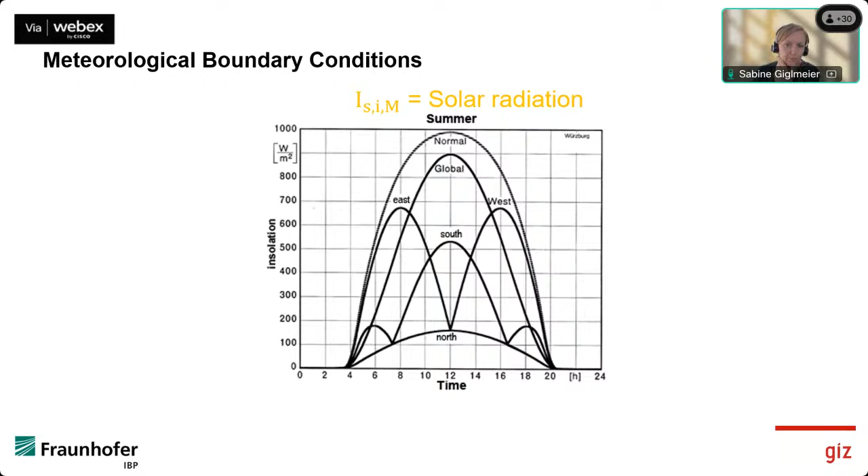Now let's look at a practical example of how the calculation of the QS value works. As already said, for each window, you'll have to calculate the solar gain and sum them all up. As a result, you get the total solar gain of the flat. If you want to get the gain of the whole building, you sum up all windows of the whole building.

To calculate the equation, the respective G values of the windows are still missing. Depending on the type of window chosen, different G values have a significant influence on the overall equation. So let's start with a first calculation where we calculate the example flat with variant 1 of the G value.

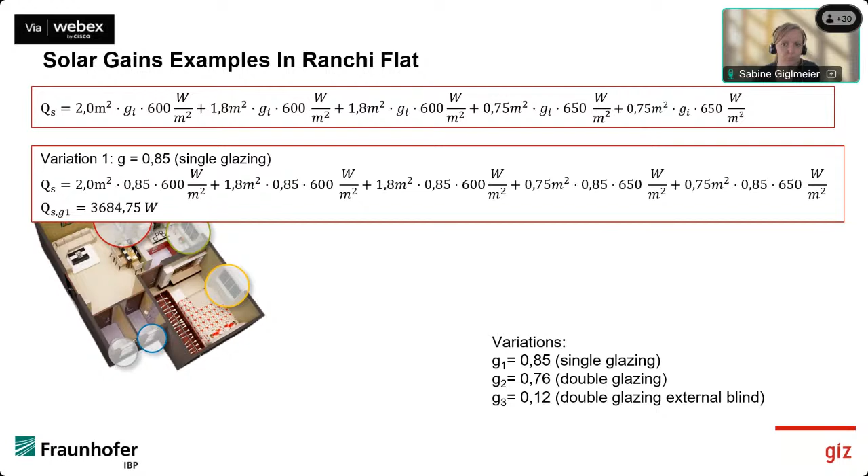Let's calculate a second variation of the G value where we have windows with double glazing. It results in a QS value of 3300 watt.

And let's calculate a third variant with external shading, and this reduces the QS value of the dwelling compared to variant 1 by a factor of about 7, to 520 watt.

So we can see that the QS value depends on the type of window, but the decisive factor is whether or not shading is installed. If you want to dive even deeper into this topic, I recommend checking our e-learning videos on the BMTPC website.

Let's move on now to the next aspect that we usually look at when analyzing buildings and construction methods: the thermal properties of the building envelope. As we discussed earlier, the outdoor climate plays a significant role in the resulting indoor climate.

We have looked at how the solar input from outside through the windows can heat up the room. Another significant role is played by the insulation value of the entire exterior wall, the thermal conductivity. The higher the thermal conductivity of a material, the easier it is for heat to flow from the outside through the wall and into the room.

Or looked at the other way around, the lower the thermal conductivity of the building's envelope, the more the interior is isolated from the climate outside. As a rule, we want to achieve the lowest possible thermal conductivity for energy-efficient buildings.

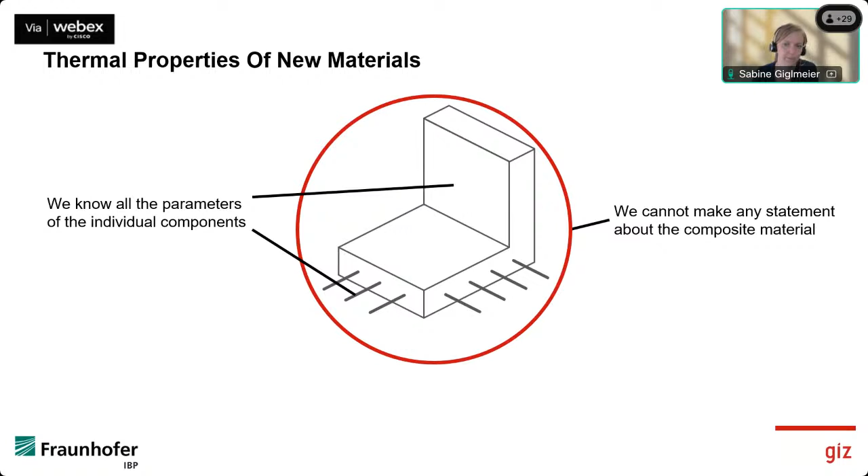Let's have a look at an example as depicted here. We do have the properties of the concrete as well as the properties of the steel, but we cannot know the properties of the composite unless we measure the combined material in the laboratory. And how do we do that?

You see here a guarded hot plate measuring device. With this device, building material samples with dimensions of 20 by 20 centimeters can be precisely examined.

In order to do so, a sample has to be put between two plates. One of these plates is heated and the other one is cooled. This generates a temperature gradient, and this forces the energy to flow through the sample. The temperature difference above and below the sample is measured, and the energy required to keep the temperature difference constant is determined. This allows the heat flow to be determined and the thermal conductivity to be calculated.

The thermal conductivity of a material is also called the lambda value. These lambda values are later used to calculate the U values of building envelopes. In the picture you can see a colleague of mine at the Fraunhofer Institute for Building Physics who is putting a sample into the guarded hot plate device.

These devices come in different variants and they differ in the dimensions of the samples that can be measured, but also in the temperature range and angle in which measurements can be performed.

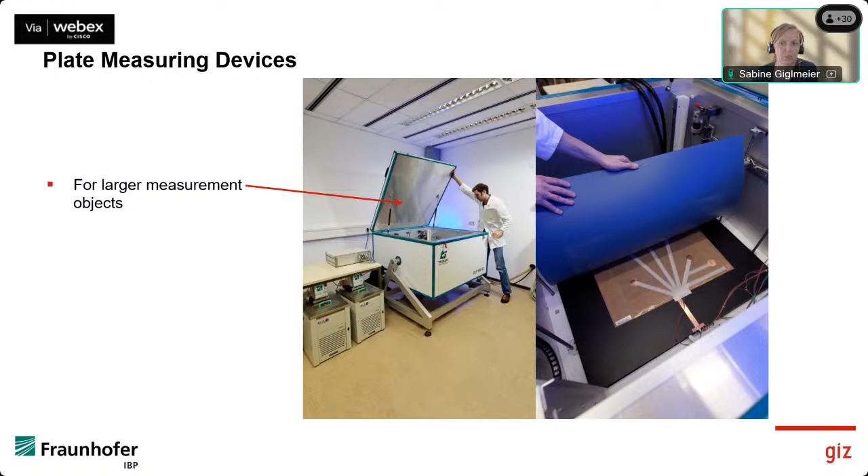In this picture you can see one example device which is capable of measuring composite materials as we have seen earlier, but is also capable of being tilted.

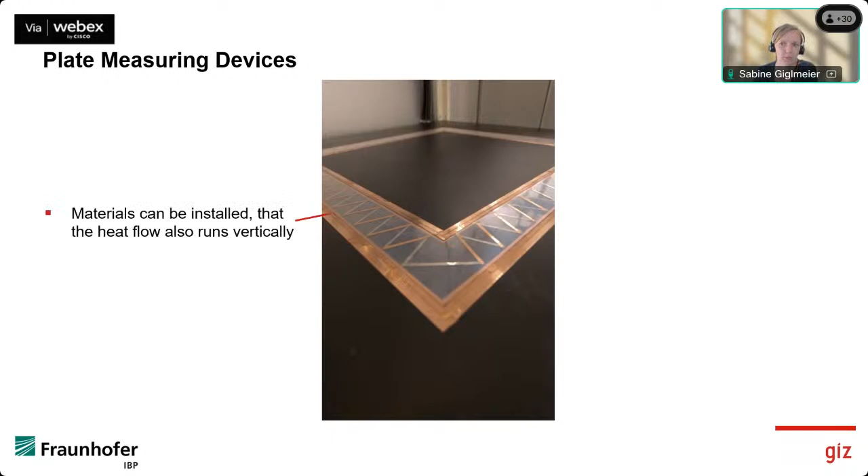Inside the device, different modules are installed. These make sure that the heat flow runs always vertical through the sample, even if the device is tilted. This is needed so that the measured heat flow gives only the heat flow through the sample. This has to be true even if the measuring is not made vertically but tilted, for example due to measurement of pitched roof components.

It is necessary to exclude all heat flows not going through the sample, as out of the measured heat flows the thermal conductivity is calculated, and even small mistakes in this measurement can lead to huge variation in the lambda values. So the devices themselves, but also the handling, is not easy and should be performed only by specially trained personnel.

As we have now seen how to measure the heat flow directly and the thermal conductivity indirectly, let us have a look at another measuring device.

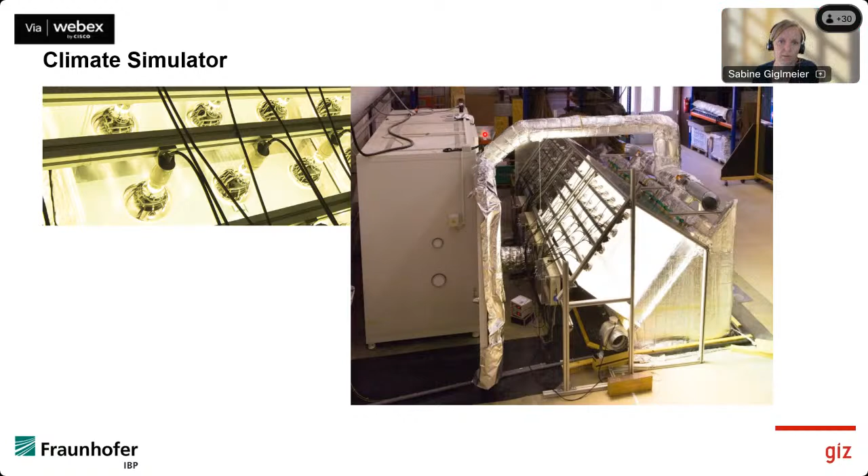But now let's go to the next and last topic of the presentation.

This brings me to the end of the evaluation of the technology in Ranchi. And now I would like to talk about one last topic, but one that I think is very important for the future of construction. In Ranchi and in the other LHPs, the material used is mostly concrete.

We had already discussed at the beginning that this material has many advantages. It is inexpensive, it can be used to create a lot of living space very quickly, and it is very stable and durable, even in very demanding environments. At the same time, the material is not particularly climate friendly, and it makes sense to consider in the medium term whether there is room for improvement in the choice of material.

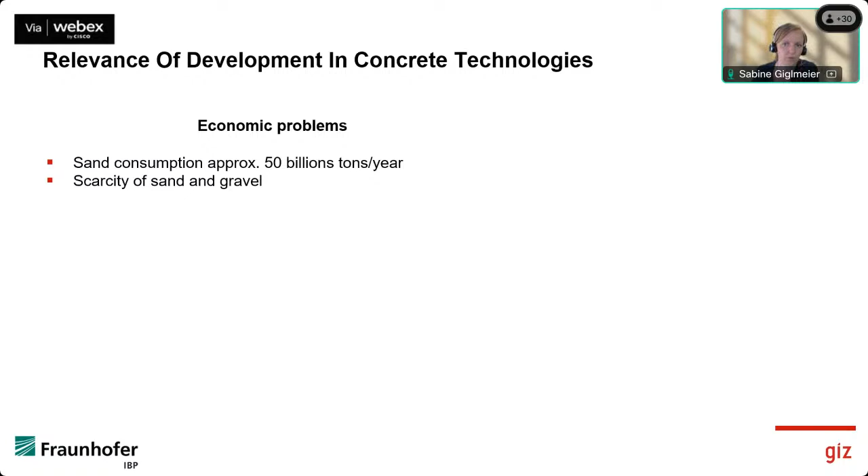Why is it like that? Each year we use a very high amount of concrete worldwide. And with this very extensive use of concrete, we have to face some challenges. We have an annual need for around 50 billion tons of building sand each year. If we would build a wall out of it, this would give a wall with a width of 30 meters and a height of 30 meters built around the equator each year.

In the medium term, we will have a global shortage of building sand resources, and in some countries, we are already today facing this scarcity.

The high use of concrete also leads to ecological problems. The cement industry is responsible for a very high CO2 emission, around 2.8 billion tons per year. So we need to reduce this high CO2 emission in the cement industry very soon to reduce climate change.

Right now, we do not have a real recycling in the construction industry, so we produce also high amounts of waste. So we need techniques to get back material out of waste.

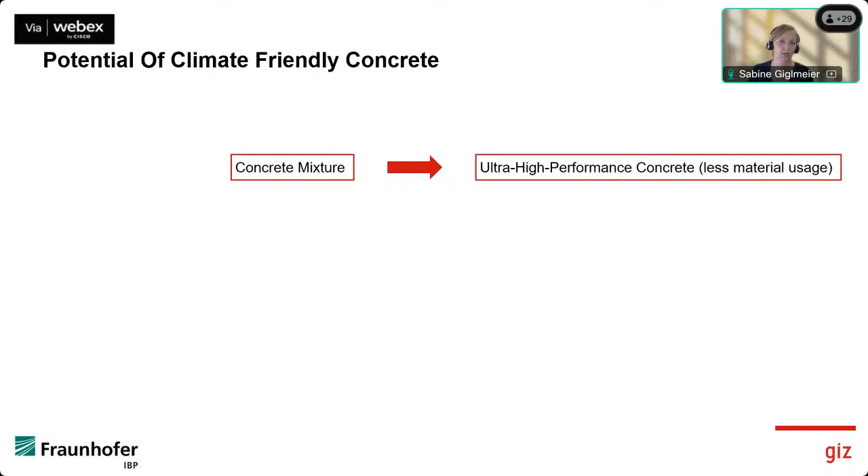We have different options to improve the carbon footprint of concrete. On the one hand, we could change the concrete mixture. We could, for example, use ultra-high performance concrete, so we need less material.

The next option is we could substitute concrete by other materials with comparable properties, but lower CO2 emissions during production. For example, with geopolymers, which have very similar properties, but they do not need any cement and need much less energy during production.

We can also use additives to improve the carbon footprint. So one option is to add rice husk ash, or another option is to add biochar. And we can also do an end-of-life improvement, which means we can recycle materials like concrete.

In further webinars in this series, we already discussed some of these potentials, for example concrete recycling. Now we want to focus on one additive that can improve the carbon footprint of a building material, which is biochar.

As you know, cement production generates high CO2 emissions. But at the same time, cement-based building materials have positive properties like stability, durability, and affordability. So we can use biochar to improve the carbon footprint of concrete.

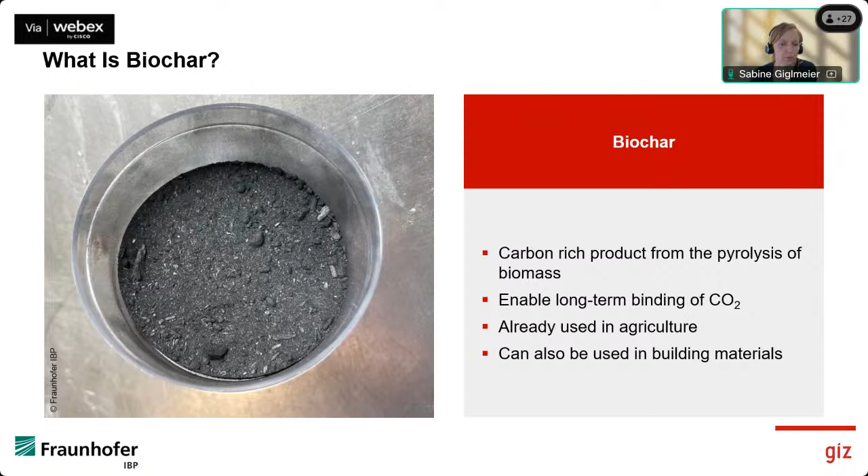To really get this process of storing carbon in biochar going, we need a profitable application of biochar. So we have it, but how do we use it? One use is in agriculture right now, but there are also potential applications as additive in building materials, for example in concrete or in mortar. And here we do a lot of research at the Fraunhofer Institute for Building Physics.

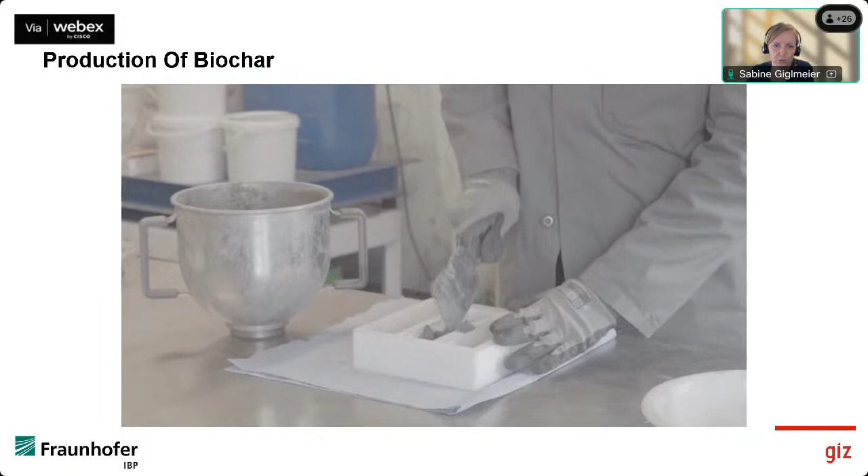So you can see here, it's just like usual mortar. You can use it and apply it like you would without any specific additives. You see it's more dark, that's because of the biochar, so you can also use it to color the mortar.

The effects of biochar in cement mortar can be noticed already during production, as the addition of biochar significantly changes the viscosity and water demand of the mortar. In the following building material tests, we notice that the mechanical strength of the mortar specimens decreases with an increased content of carbon. In sum, you will notice changes in more or less all tests.

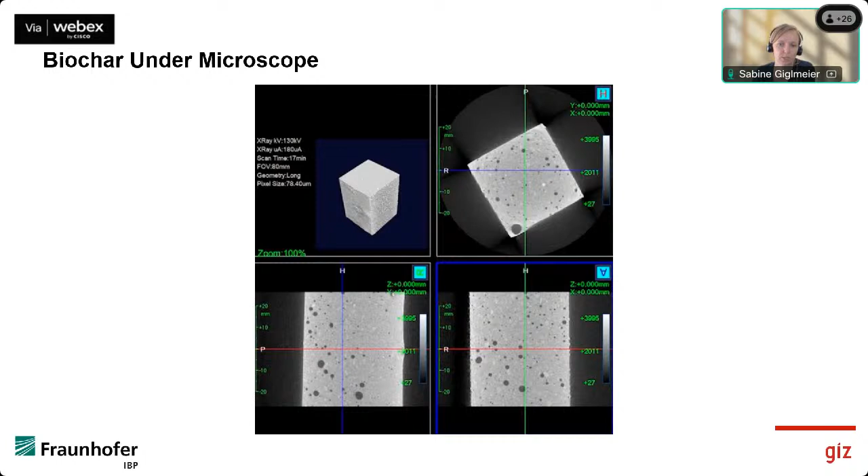This means that, depending on the properties of the biochar, its addition in cement mortars is limited to a few percent. Up to 2% the changes are slight and even acceptable. At the moment, regulations currently allow us only very small quantities to add as a coloring agent, but in order to improve the eco-balance of a building material, the proportion must be increased.

However, we can see that a lot is currently happening in the market. Cement producers are under very high pressure to significantly improve the life cycle assessment of their products in the near future. We therefore expect numerous products with biochar additions to come onto the market in the coming years.

And with that, I want to close this presentation today. As I said before, if you like to dive even deeper into the presented topics, you now have the opportunity to do so on the platform of the Global Housing Technology Challenge. There you will find extensive e-learnings on the various aspects of the technology in Ranchi, but also all the other Light House Projects. So thank you for the attention.